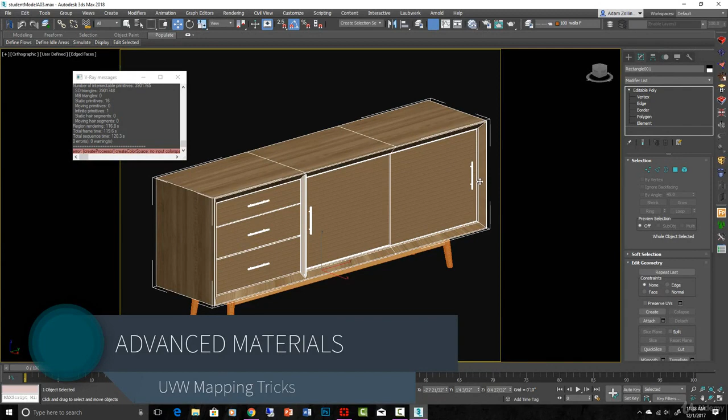Now let's go into the file that I provided for you and look back at our credenza. Here we are going to first make sure that it's all mapped properly, which it is not. So let's make sure and do that first.

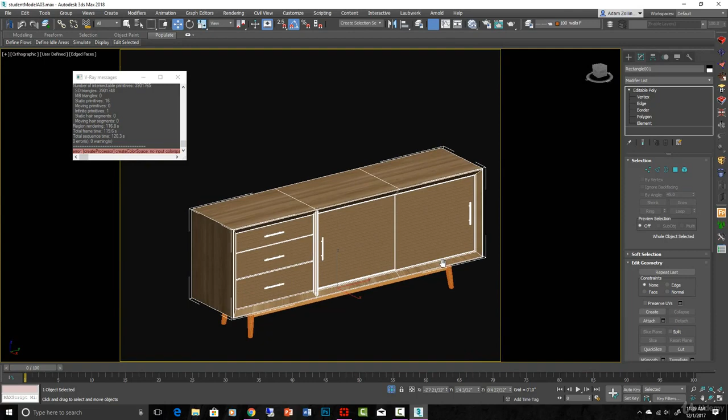It's got the same material on it as the wood table material we just looked at. So I'm going to create our own material. It might be based on that same wood grain map, but I don't want it to be the exact same material. Let's take a look at it.

First of all, we got to get it all mapped properly. So aside from unwrapping this entirely, you can just do a cheat unwrap by doing UVW map modifiers on just certain elements and then collapsing them into your poly.

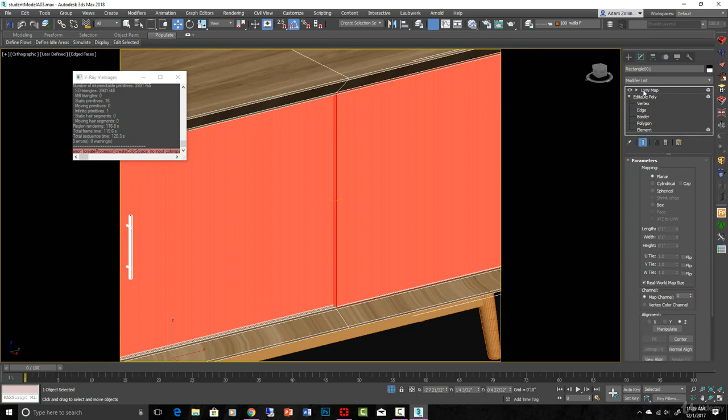So if I put a UVW map on that now and do a box, you can see it through the red there. Do we want it to go that way? No, I think we want it to go that way. Make sure it fits onto there, like that.

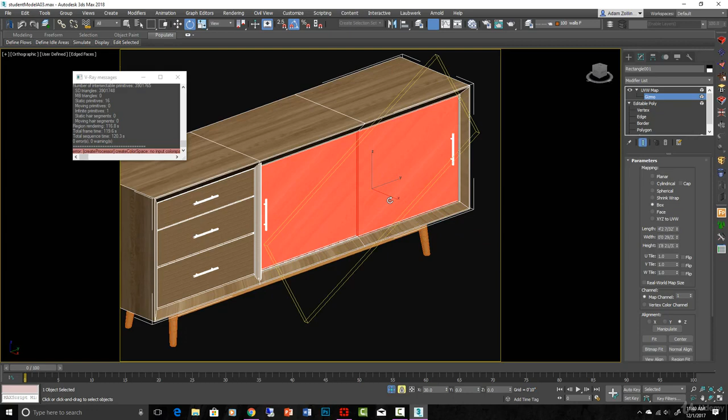So align it on the z-axis and fit it, and you can see my gizmo right there. Okay, so that's how it's mapping onto there. If I rotated this gizmo, it would look like that, which would actually be kind of cool, if I had those doors like that.

Tempting. And then make the other one the opposite way. Let's do that just for fun. Convert to edit poly, and that is now burned into there.

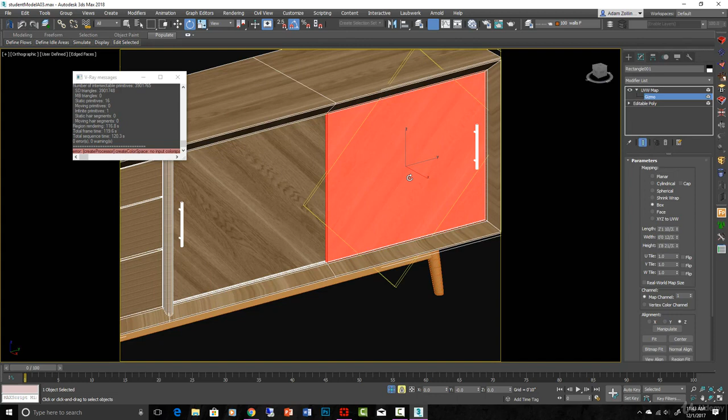Now if I select just this other door, do the same thing again, but reverse it. Go into the sub-object mode, gizmo. Make sure it's selected, rotate it 45. And then while you're selected in sub-object mode, convert to edit poly again.

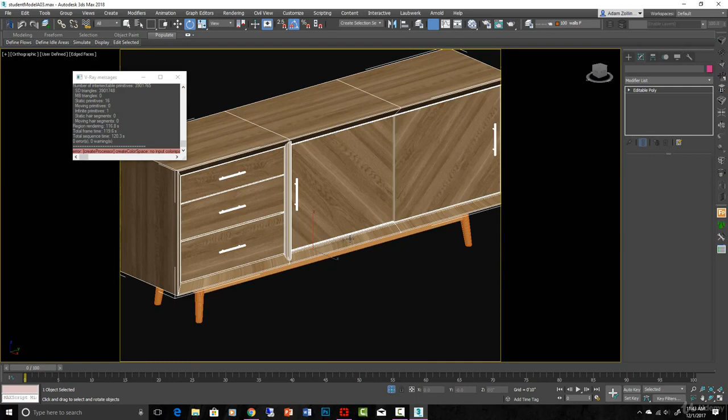Cool. Okay, these can all be mapped together probably. Just put a box modifier on that. Now you could go in and turn off real world there, making it just fit to those three. You could go in and unwrap all of this. That'd be considerably harder and a lot more work than what we're doing right here. As long as the box map can work.

On an organic piece of furniture, this wouldn't work. You'd have to still go in and unwrap. But with this boxy shaped buffet, we can do it.

So let's select this element. This one might be kind of hard. Let's see what we get with just a box modifier. No real world. So on those edges here, it's not working.

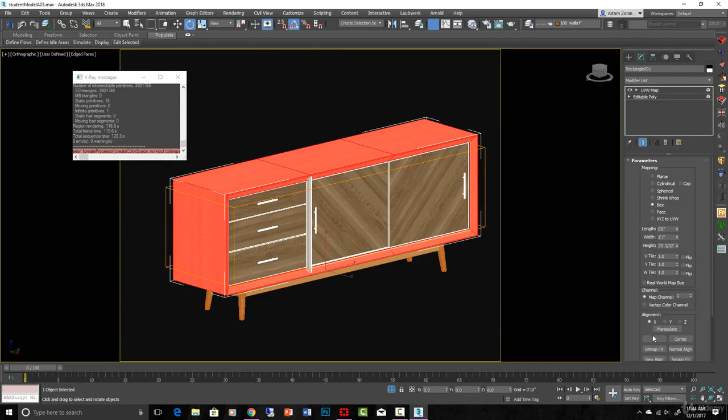Everywhere else, no, I want the grain going the other way, like that. Let's fit it to the object, so that gizmo hugs right there to the corners. Okay, so I think that's right.

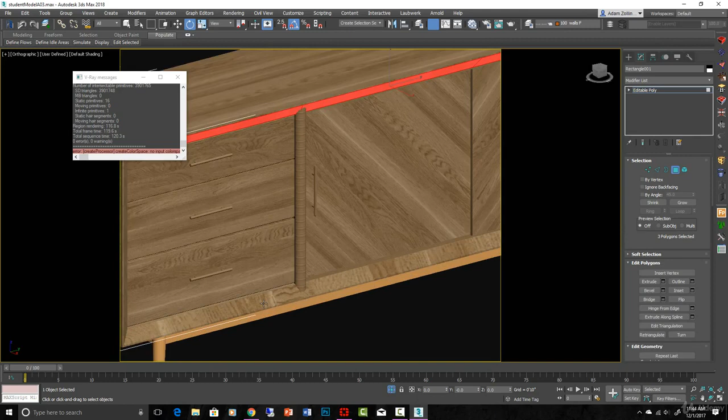We're going to need to work on these inside faces. So let's convert to edit poly again. Burn that UV mapping in, and then let's select these faces and map those.

Okay, we're looking pretty good there. There's definitely some incorrect mapping going on here with this object. That should be an easy box map.

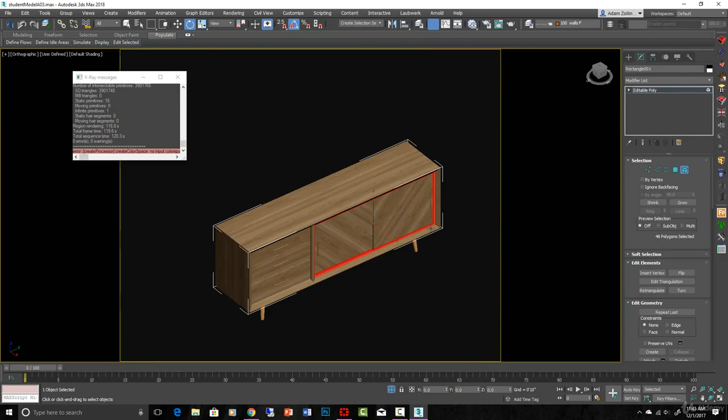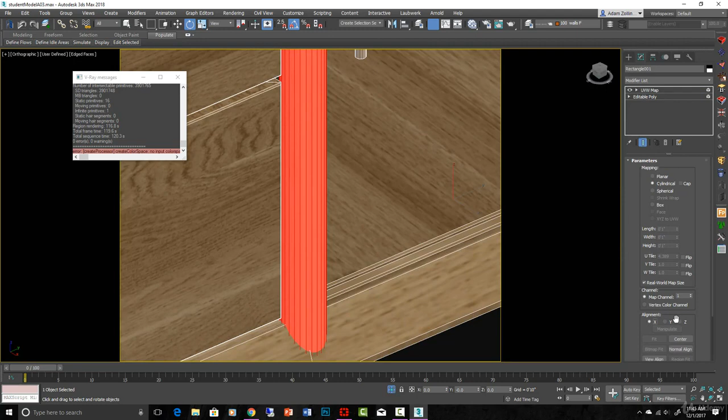That's fine. Let's get this one right. So actually we could have been a lot more careful about this when we were modeling it to make sure that we map everything properly. But here we are doing it manually later. That one's not quite right yet.

Let's look at the gizmo here. That'll give us a clue. No. Yes. That little orange gizmo in there. And then we need to turn off real world. That's what it is.

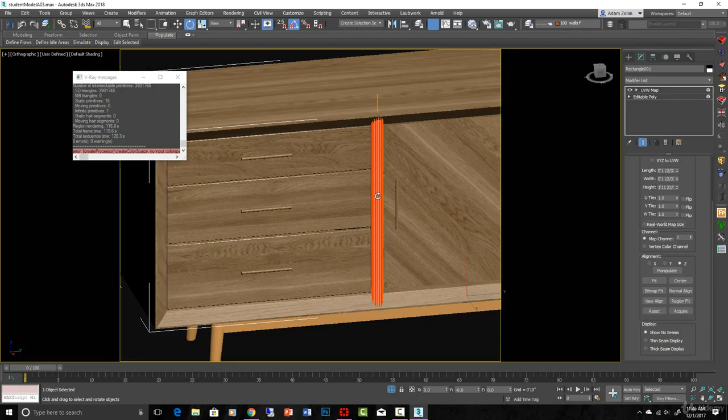And actually, we need to change the tiling on that one too. So let's set that to 0.25, something like that. Let's leave it like that for now.

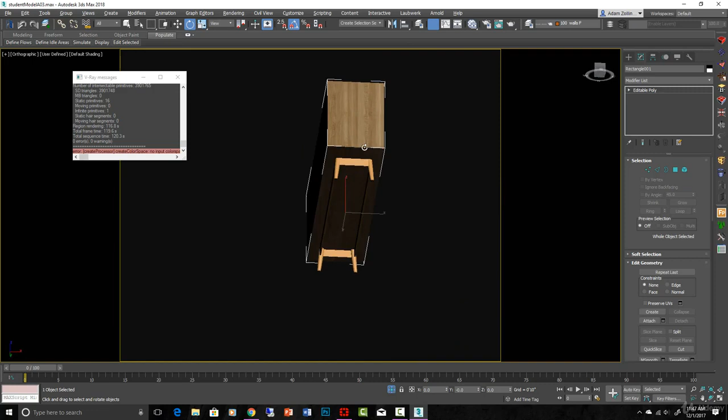Okay, now obviously we have to work on these materials, but our mapping is basically right now. Looks like our back is wrong, and I think the bottom is wrong too, but I won't make you suffer through any more of this. We'll just get that mapping right.

Okay, the problem I was having on that bottom there was actually caused by it being a different material ID, but that's okay, we got it all figured out. So here's our credenza all mapped out, except for the bottom legs. So let's do that real quick. This should be a simple box map down here, at least for these four elements.

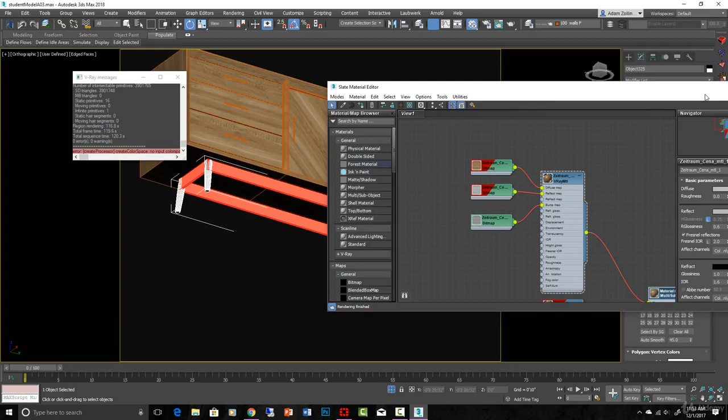Let's make sure the same texture is applied. Find it in our slate editor, and apply it. Assign material to selection. Make sure we're on ID 1, like so, and then apply a box map.

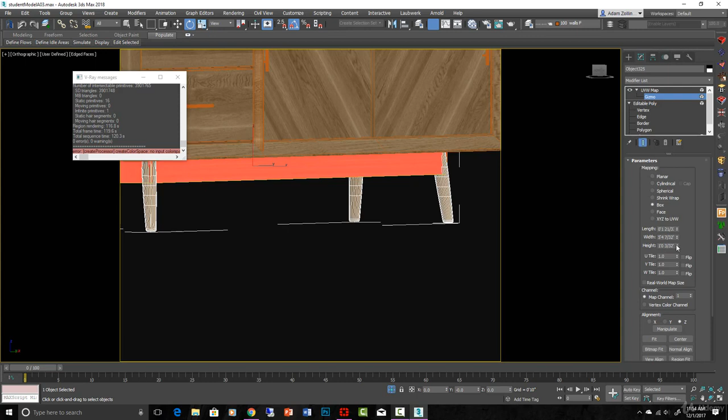Make sure our gizmo is about the right size. I think on this one we want to be a little higher. Now you see on the end it's not right, so we don't have our alignment right. That's more like it.

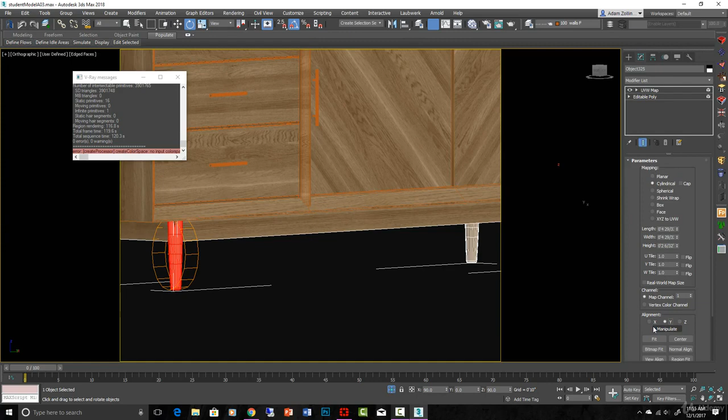Convert. Okay, that's good. And then I'll just do each of these legs as well, probably with cylinder maps with the proper alignment, which would be the X alignment and then fit. Okay, so go through and do that, get all our mapping right. A little more complicated than a simple box map, but that's one kind of way to cheat, do it really quickly, as opposed to unwrapping each face and mapping them all individually.

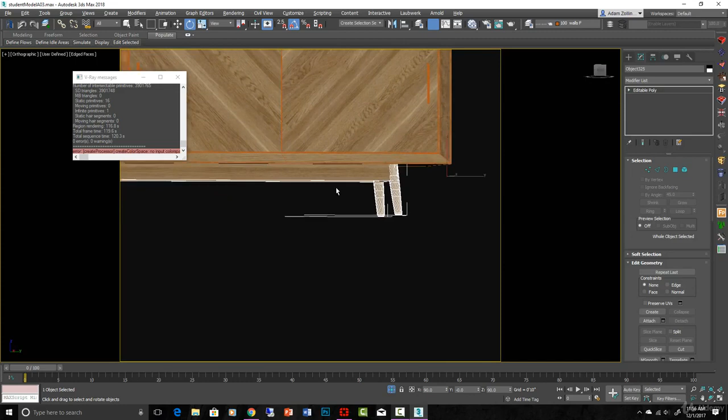The other way to do it is to make sure they're mapped properly as you're modeling so that you don't have to go back and do all this work. But in the next lecture, we will create a very nice custom texture for this credenza now that it's all mapped very nicely. Okay, one final thing that I should show you on the credenza before we go is that...

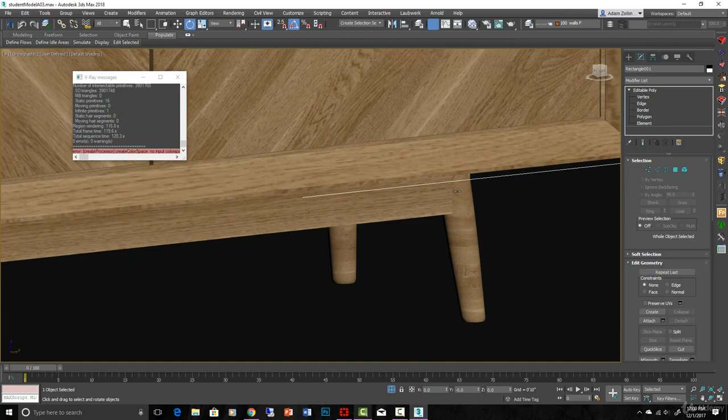See how this grain is kind of running horizontal on this peg leg here? I want it actually running vertically. So what I'm gonna do, a little trick for that, let's go in the compact editor here.

I'm going to take a copy of the wood material and do that with it, and take this material that's on everything here, material 1, and copy it to here. But on this one I'm going to change the sizing and the rotation.

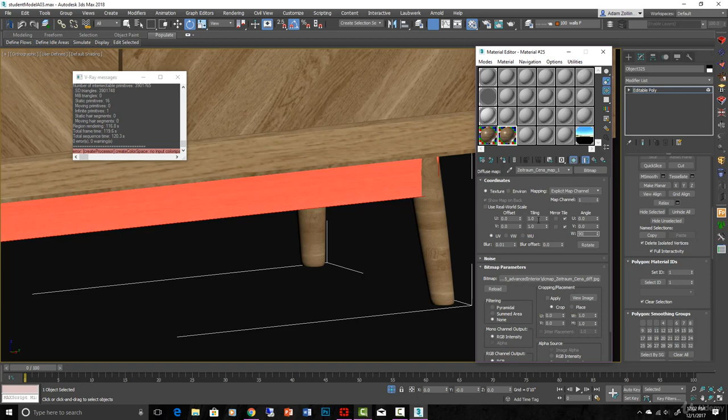So this one's going to be 90 degrees rotated in the W direction, so it'll look like that instead of like that. And then let's scale it like that, so it's scaled up bigger.

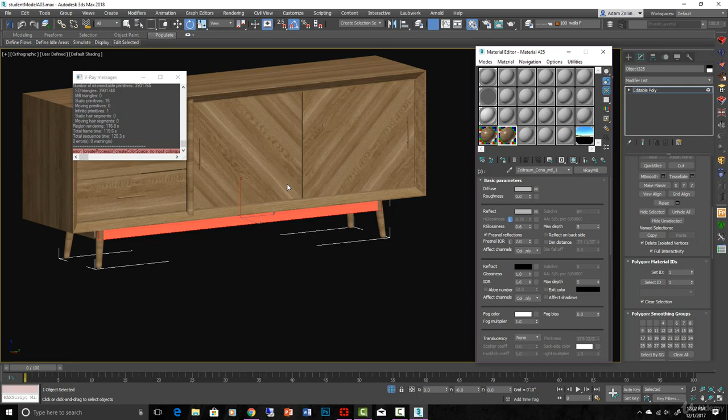Okay, so this is going to be for all the verticals, these peg legs and this one. And then once we have that material, all we got to do is change all the verticals to that sub-object mode. So you'll have to make sure that on each map it matches. So we want this at 90 and at 0.5. Of course, there's only 3 maps, so that's easy enough.

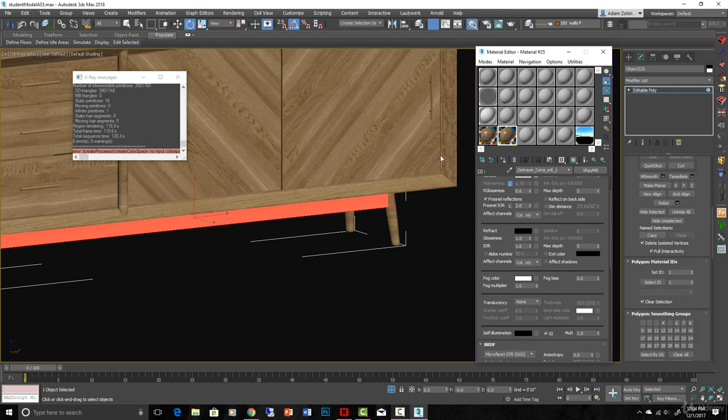Last one is the bump map. Make sure to do this on all maps for that texture, or else you'll have some wackiness going on. Okay, so now we have the material ID 1 is the horizontal and material ID 2 is the vertical.

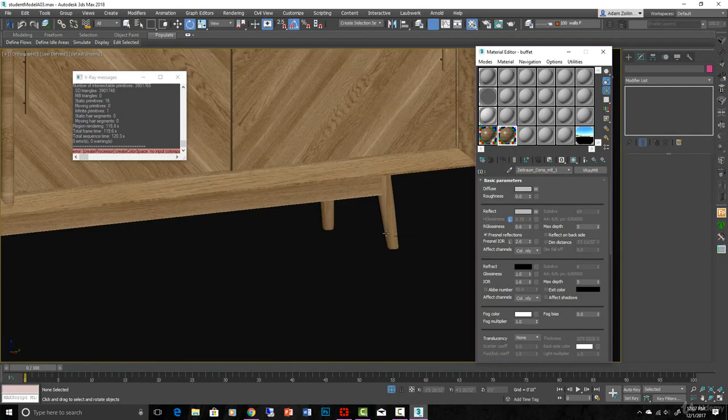Okay, there we go. Once we get all the maps rotated, we can make sure the right material is applied and then make these ones material element number 2.

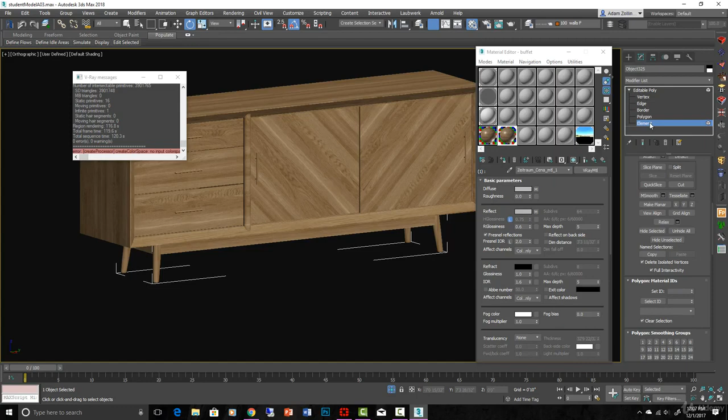So if you select them now and go to the material IDs, it's number 2, which is perfect because those are the verticals. I want to do the same thing for this vertical right here, and then we're good to go with this. Set that to ID number 2. There we go. On material ID 2, it is working just great.

Still some weird mapping going on in here, but I can fix that on my own. You guys get the idea. You guys know what's going on.

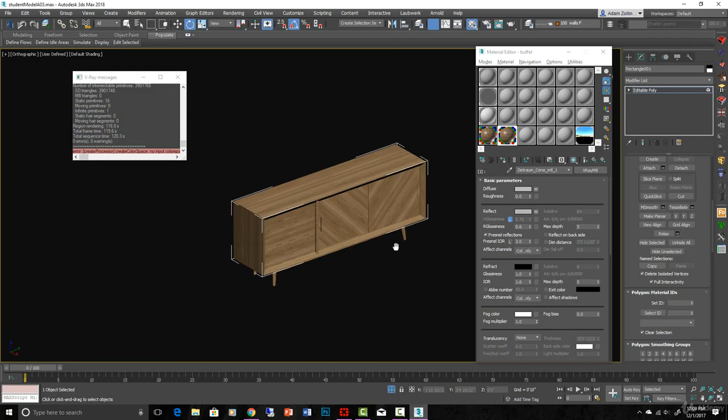So that's pretty great. This is ready for, now we're going to adjust the maps to look like what we want for this credenza, and it'll all be mapped on here properly. We just need to come up with some new texture maps and make a nice material for it, and it's going to look great. The only other thing we're going to need to do is make another object or another material in our multi-sub object for the metal handles.